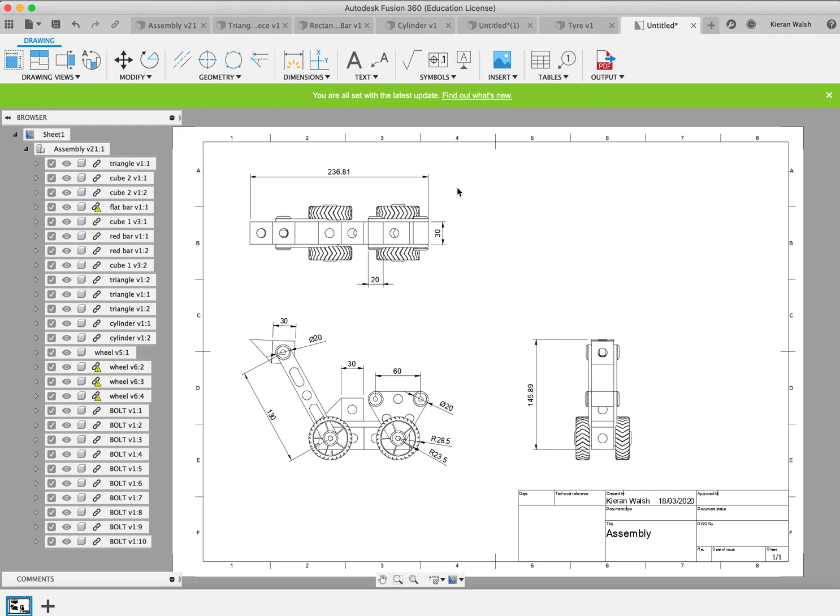By the end of this tutorial, you should be able to produce a technical drawing, an orthographic view like this. We have three images: front view, top view, side view of the object you've just assembled.

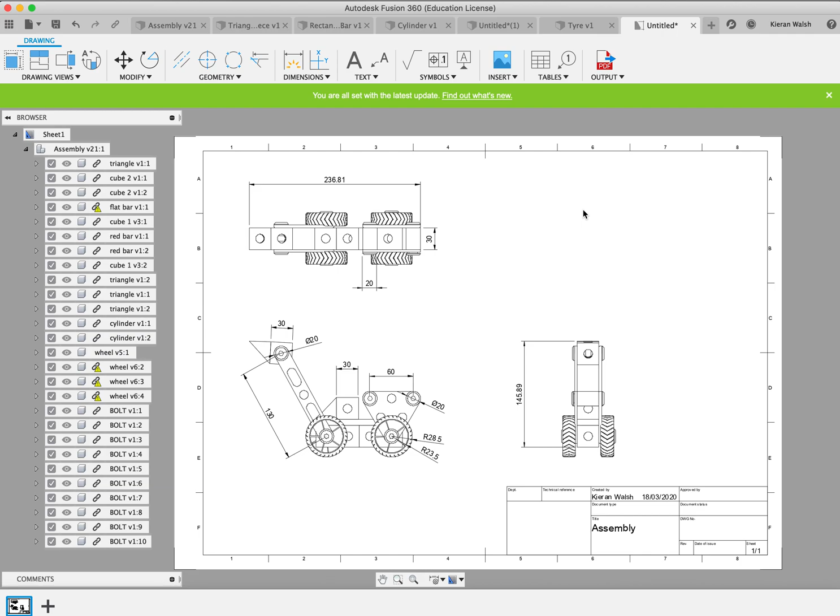To do that, you have to have created the assembled view. It has to have been saved, and you should have it open in the software. You then go to File, New Drawing from Design. On the right hand side, you should see a tab appear with some options. You don't need to change them. Depends, you may want to, but I just keep them on these. They should create the sort of image I want, or the working drawing that I want.

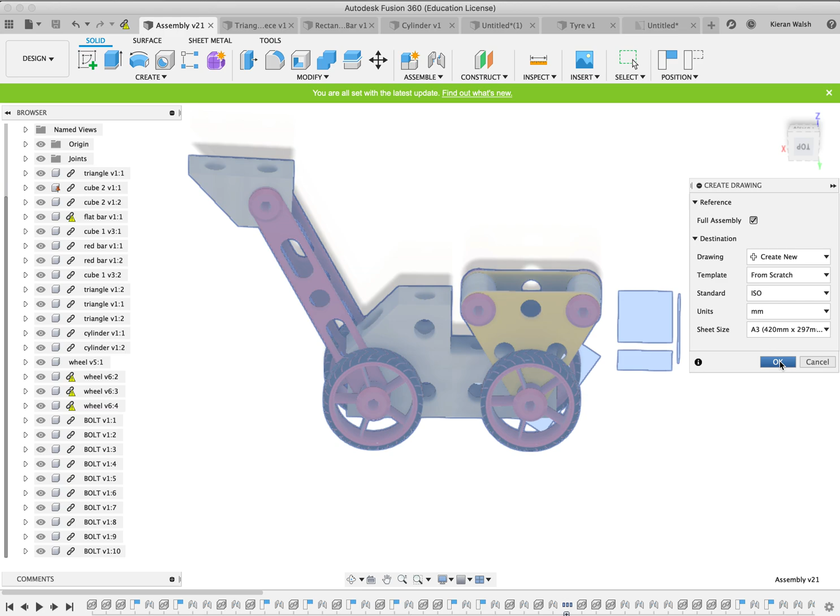Click OK. It can take a bit of time to generate this image. There you go. So you can tell that's the A3 page, and this is your first view of the object.

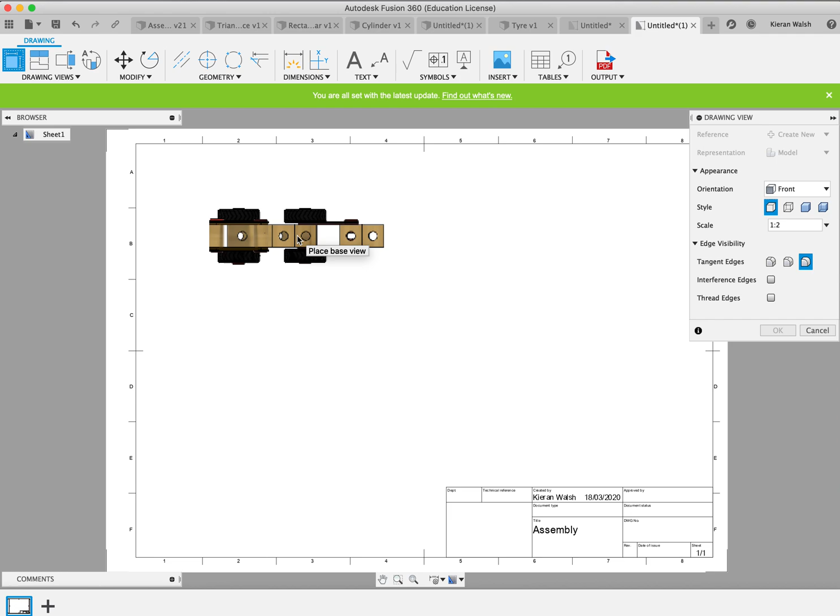Doesn't look correct to me, so first of all I would change the scale. Let's bring the scale up to say 1 to 2. That looks better. I should be able to fit 3 views at that scale onto the one page. You can always change this scale later anyway.

It's also not the right view. I want to start with the main view here, what's called the front view. The front view for me is the main view of the object, which shows the most detail.

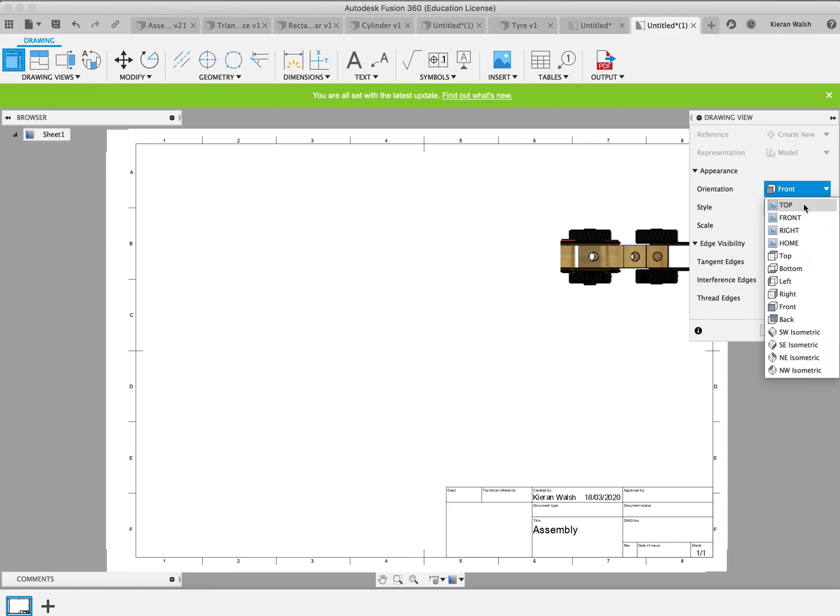So I'll just click on orientation and go to top and see. Okay, that's better, but obviously it's upside down. But I can fix that. It's appeared upside down because it's been assembled upside down in relation to the work planes, which can happen. It's quite common, even I make that mistake. So it's a good way of learning how to change it anyway.

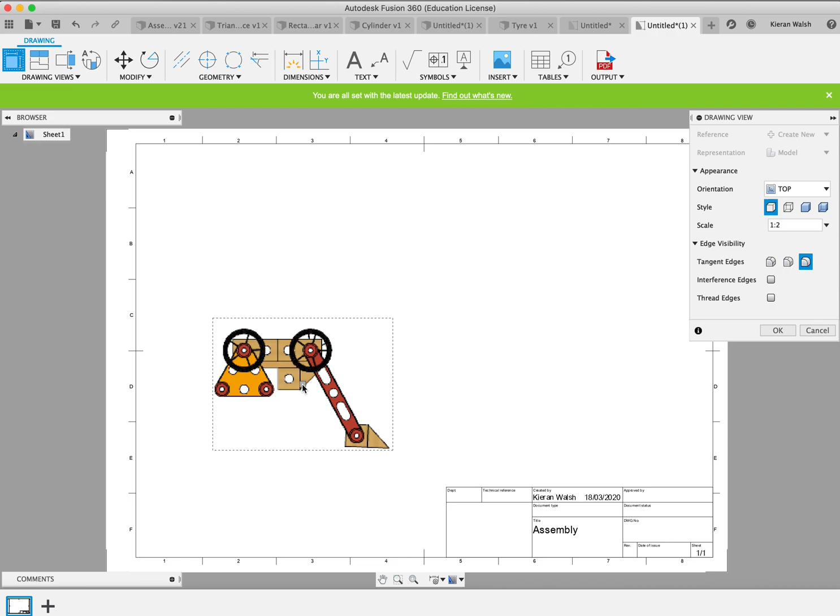So I just click and hit enter, and that creates a line drawing of the front view. It's upside down, so what I need to do is right click on it. Right click. Right click. I'm going to modify and rotate.

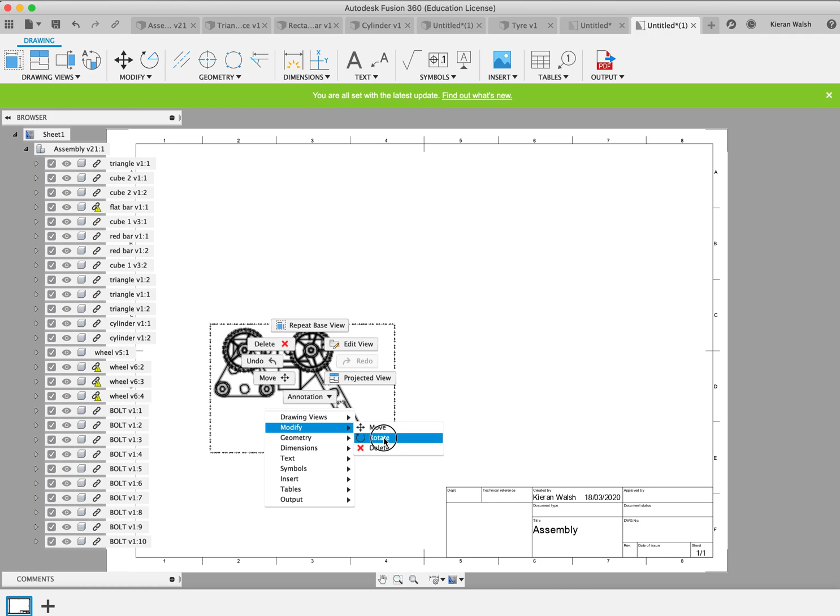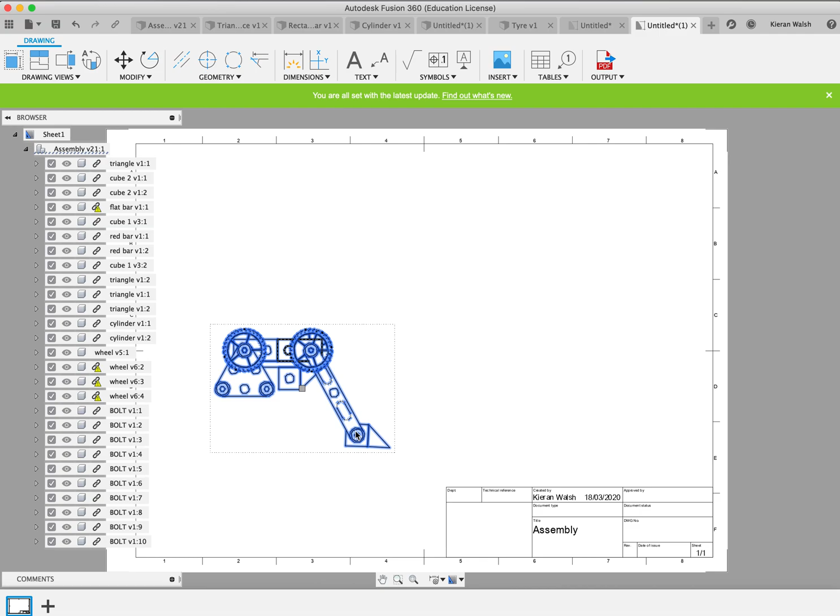And simply click in the middle. A bit slow, let's try it again. Right click, modify, rotate, click in the middle, and then just spin it around. Make sure it's straight, and that's it. Click OK.

Move it down into a better position. Okay, that's the first view.

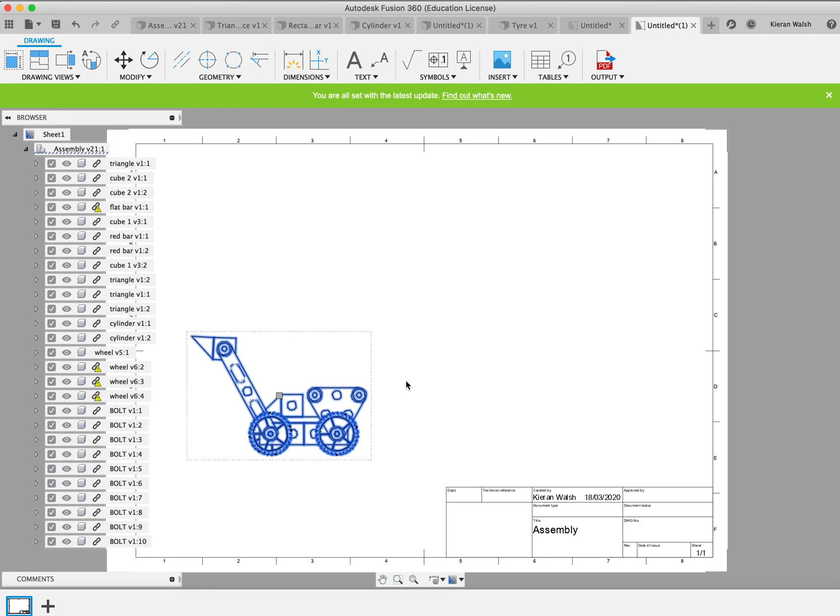Then what you want to do again is just click on the image, right click on it again until you get this menu, go to projected view. Now you're going to simply create the projected view looking onto the side of that object.

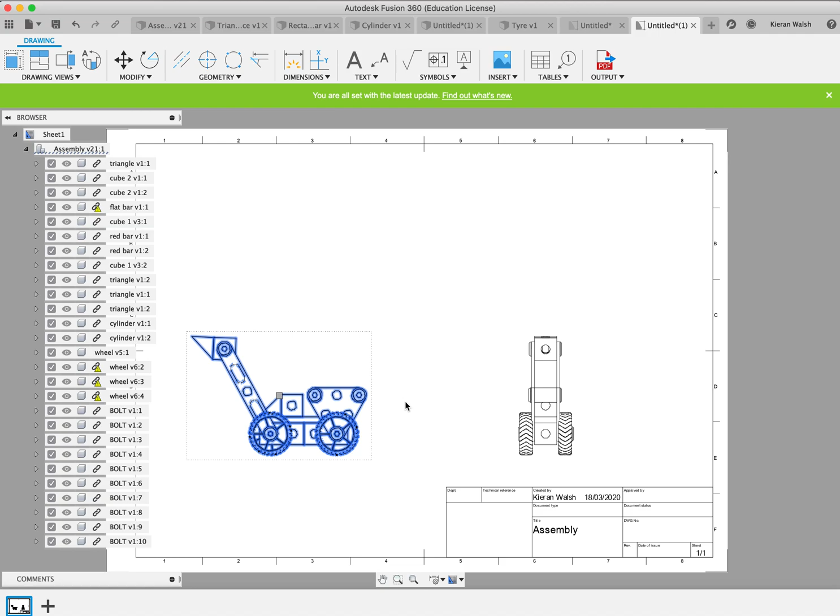Click, press enter, and do the same again for the top view. Right click, projected view, and simply move the cursor up, and you will see the top view appear. Click, press enter, and that's it. That's the 3 views you need. They're all aligned because you've projected them out from each other, so they're in the correct positions.

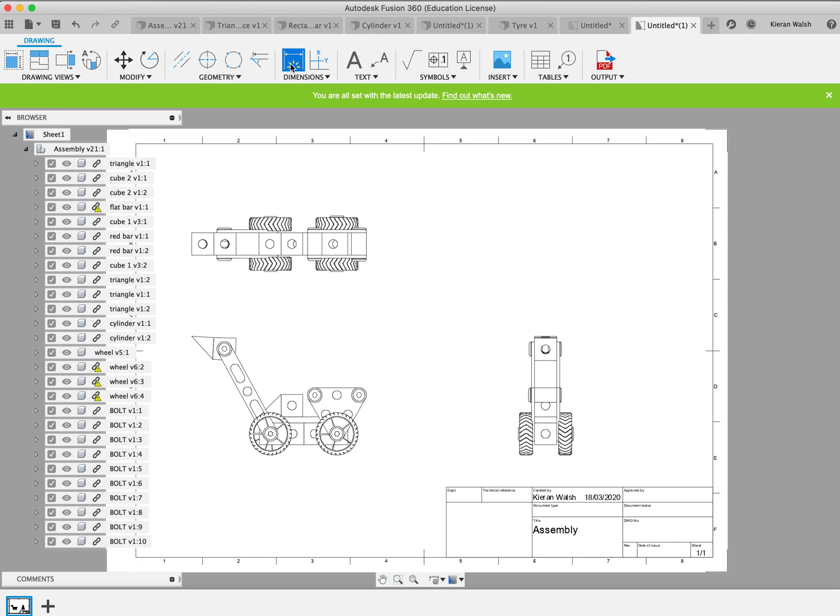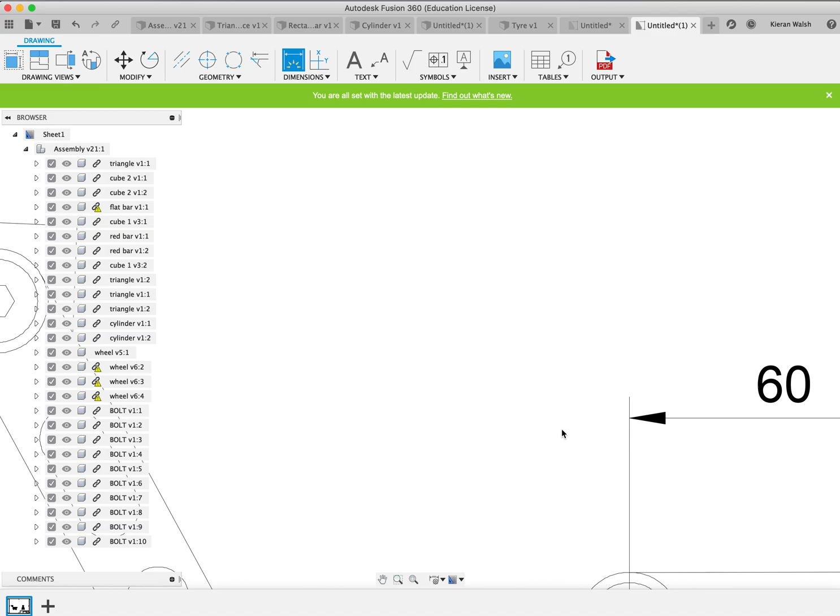Now what you want to do is add dimensions. Click on dimensions, roll in so you can see what you're doing. For example, I want to put a dimension from here to the center of this, and drag it away. Don't leave dimensions in the middle of the drawing of the object. Always drag them away outside the object. Just add dimensions until you've got enough dimensions, which should help somebody understand your drawing.

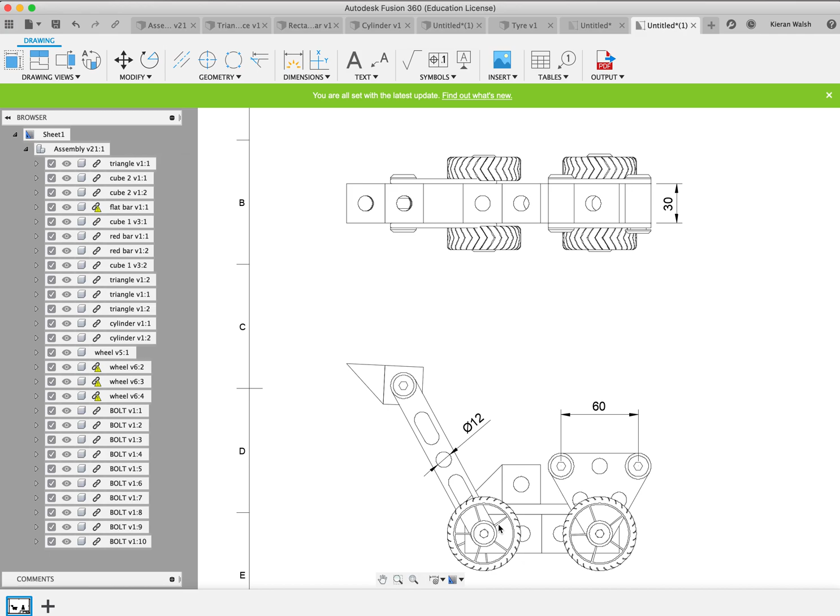If you've got circles and you want radiuses, you can go down here and choose different tools like diameter dimension. Click on that. It'll drop the diameters for you of circular objects. Again, drag them away from the object as best you can.

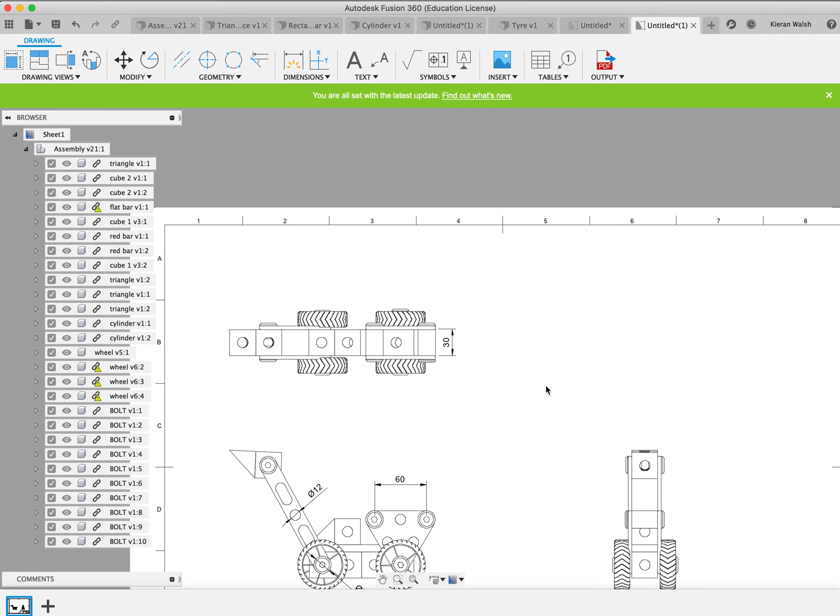The idea is you add different dimensions to different views to help somebody else understand the object and what dimensions are each part. Usually you would produce multiple orthographics of different parts, so you would do an orthographic of this part and that part, so you have multiple drawings to help somebody else understand the whole object.

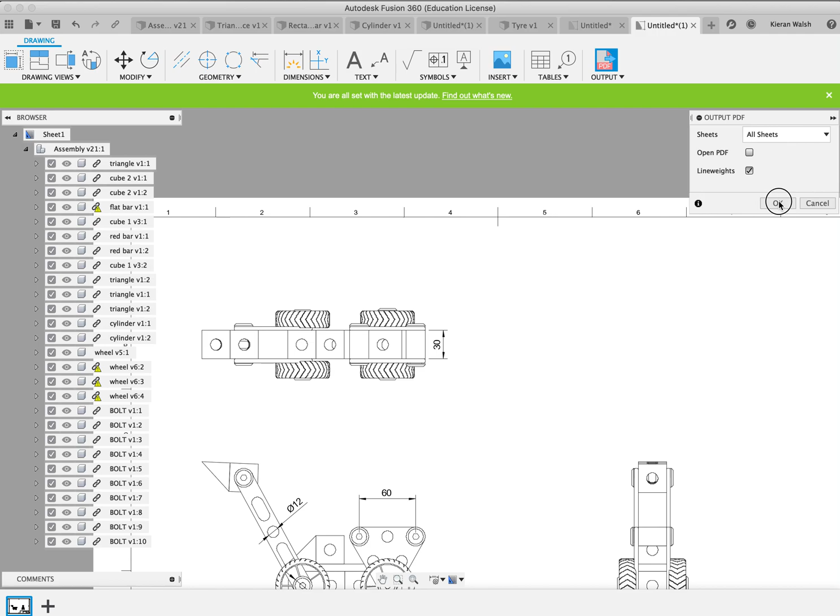Once you're finished, once you've added enough dimensions - I'm not going to do it, you should have more dimensions than this - you simply output PDF, and click OK. And that should be it. It should create a PDF somewhere for you so that you save it somewhere. Give it a name, save it somewhere you know where it is, and then you can bring these files into your folder as a PDF.